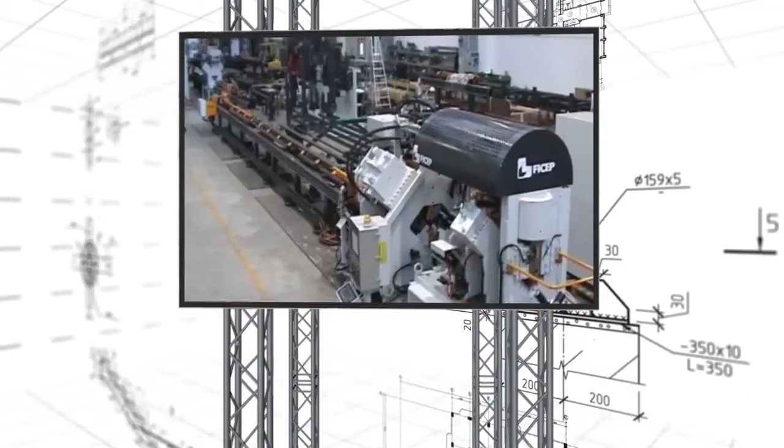The extensive product line for the fabrication of angle iron has traditionally anchored a major segment of FICEP's world-leading position in technology and productivity for structural steel and plate fabrication.

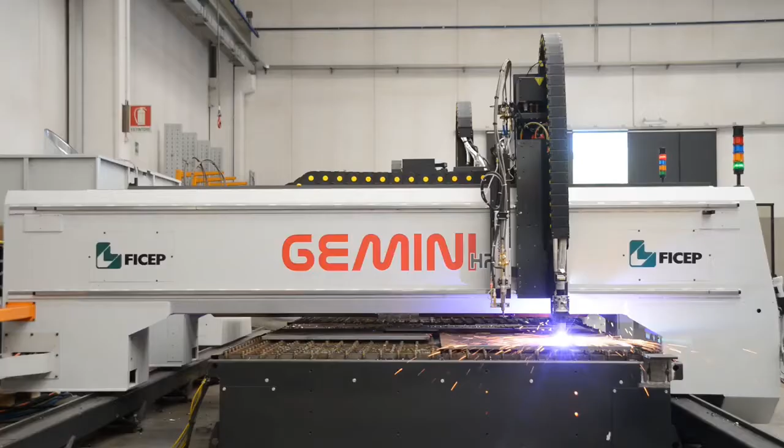The applications that FICEP's rapid angle lines are addressing today are generally for angles found in bridges and some tower components, where high-tolerance holes must be drilled as specified by code.

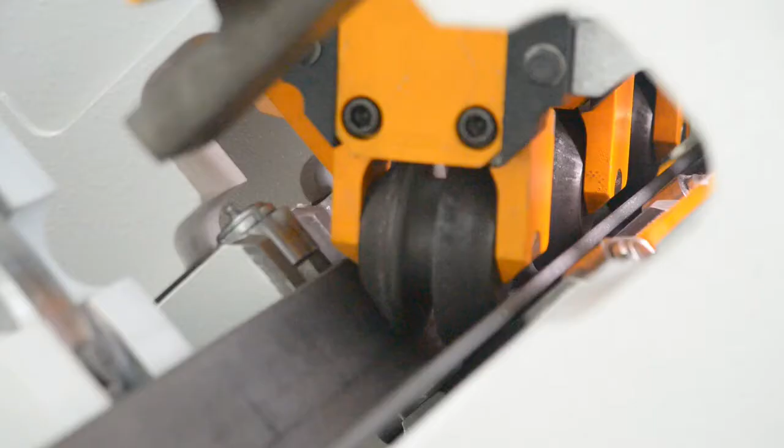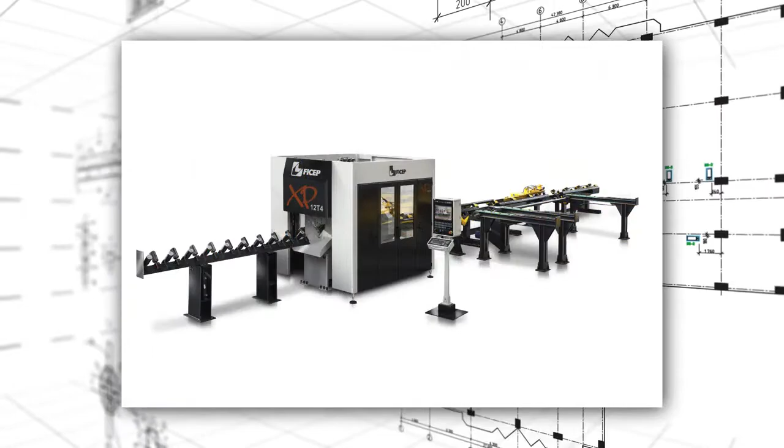FICEP's HP, SP, and XP angle lines feature punching and shearing of the parts with rack and pinion positioning and measuring systems. They are ideal solutions where a high tolerance is specified for the fabrication of many manufactured products and construction projects like towers.

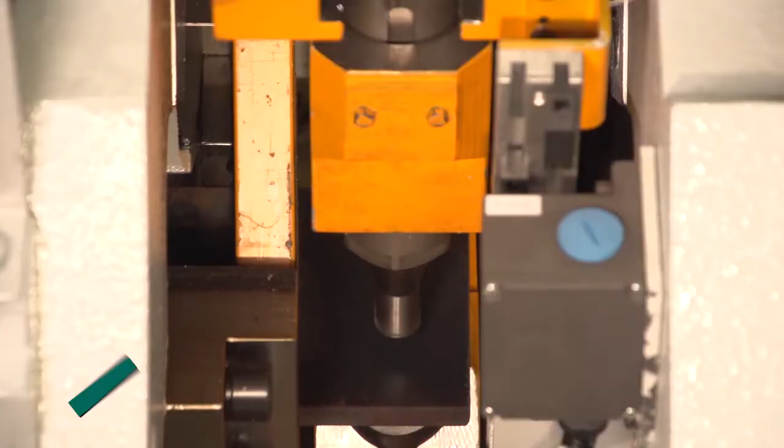The focus of FICEP's A-series angle lines is generally furnished for detail elements found in typical structural steel fabrication. The entire punching, shearing, marking, positioning, and measuring systems are all incorporated within the fabrication cell.

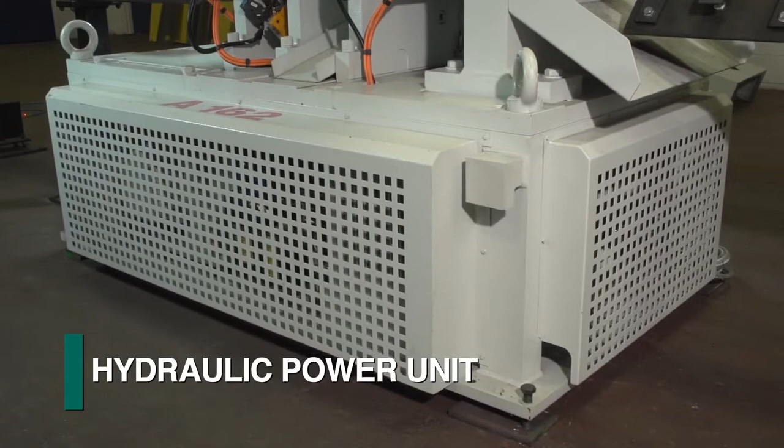Even the hydraulic power unit is integrated into the machine base to minimize the required footprint. This design configuration makes the A-series lines ideally suited for locating the infeed outside the general fabrication bay.

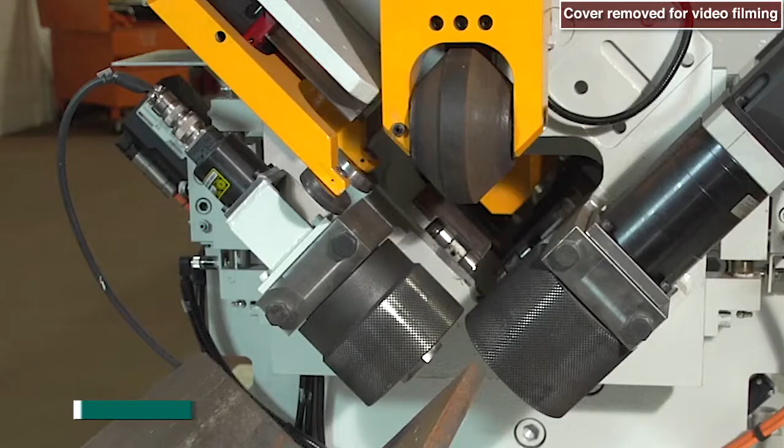Once the leading end of the stock material is conveyed past the initial roller feed drive assembly, it is clamped hydraulically for automatic positioning and measuring.

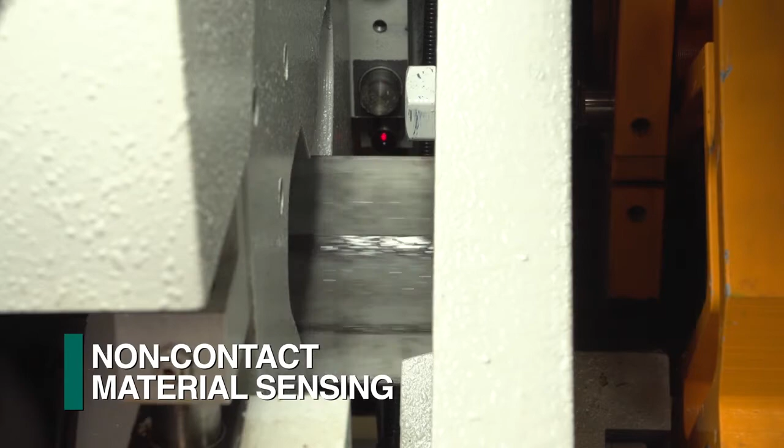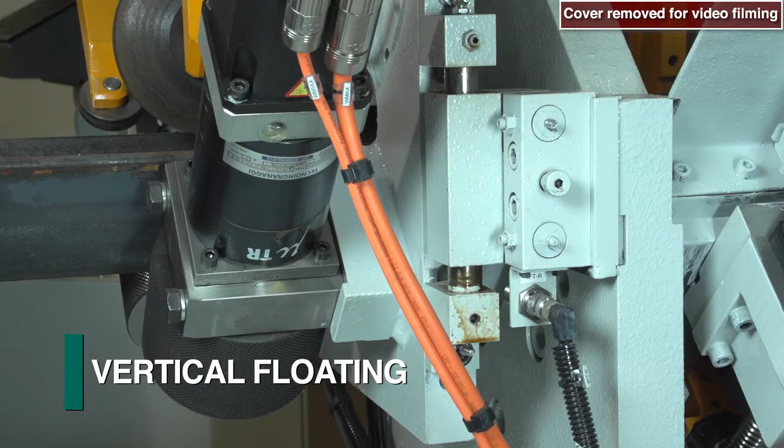The leading end of the stock material is established with a non-contact sensor as a reference to locate the programmed operations. As angle material can be received from the mill with such rolling tolerance deviations as twist and bowing, the roller feed system on the A-series angle lines is designed to float both vertically and laterally.

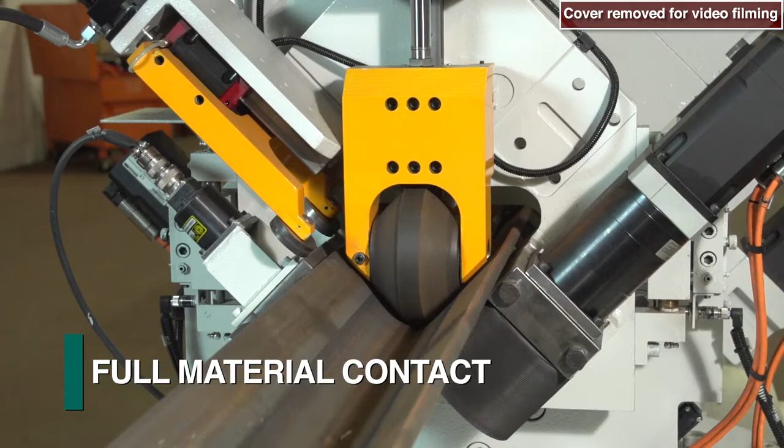The roller feed assembly consists of two serrated wheels, one for driving and the second for measuring. Both maintain full contact with each angle leg surface to achieve maximum performance and accuracy.

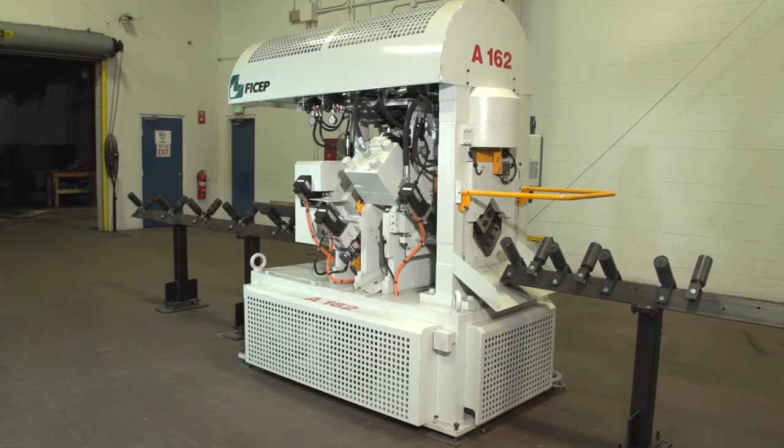The heart of the fabrication cell of the A-series angle line centers around the punch press assemblies. The two punch frames are totally enclosed bridge-style presses that are rigidly mounted to the machine base.

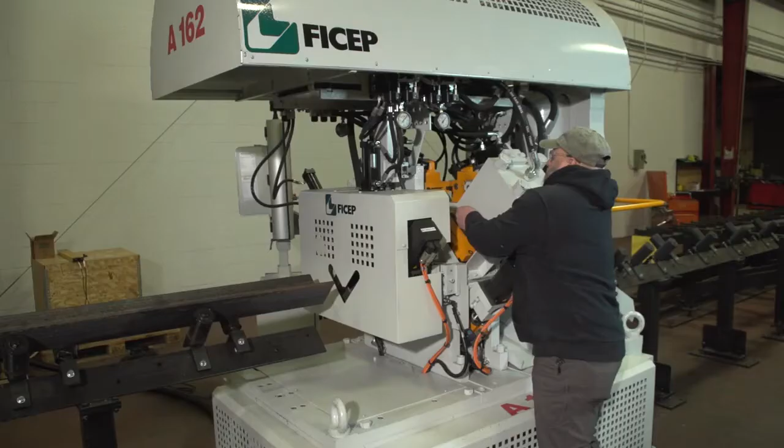Each bridge press assembly can be furnished with 1, 2, or 3 quick-change inner C-frames. They can be easily removed, and they are keyed to facilitate the alignment of shape tooling.

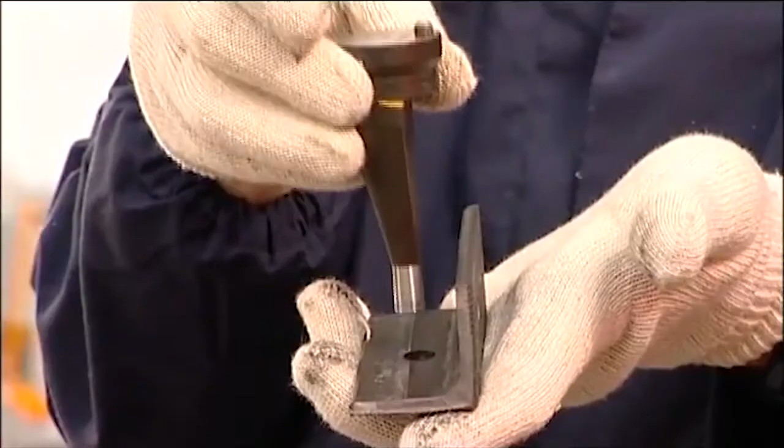This design enables the utilization of different C-frames to accommodate the maximum hole size and even special tight gauge applications in the same part. Once the tooling is changed, the inner C-frames can be slipped into the bridge presses in seconds. Each inner C-frame is a separate controlled axis that can be rapidly positioned to the required gauge line to minimize non-productive process time.

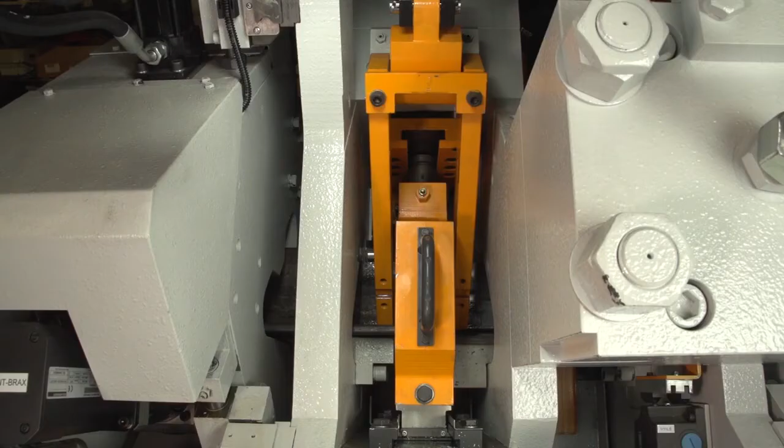Only the tooling is moving to accommodate changes in the gauge line, as the permanently mounted press remains stationary. When the inner C-frame is not required for punching, it is positioned outside of the punch ram so it is not activated.

This design eliminates the need for punch gag assemblies and their related parts to accomplish this function.

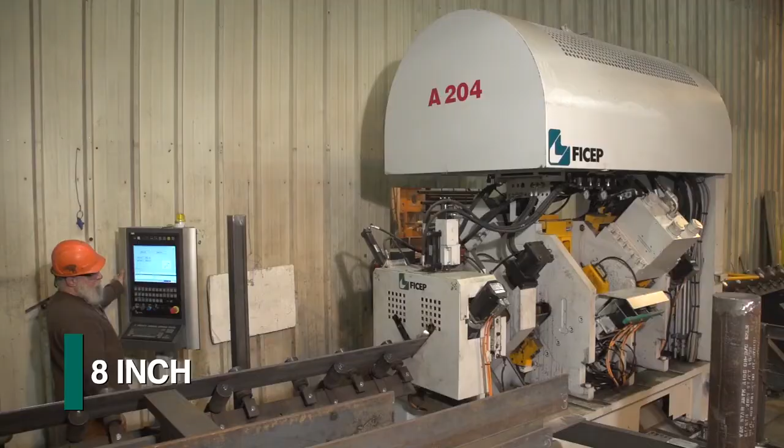The FICEP A-series angle line models for 160 or 200 mm angle legs can be furnished with either a programmable or a cartridge-style marking press.

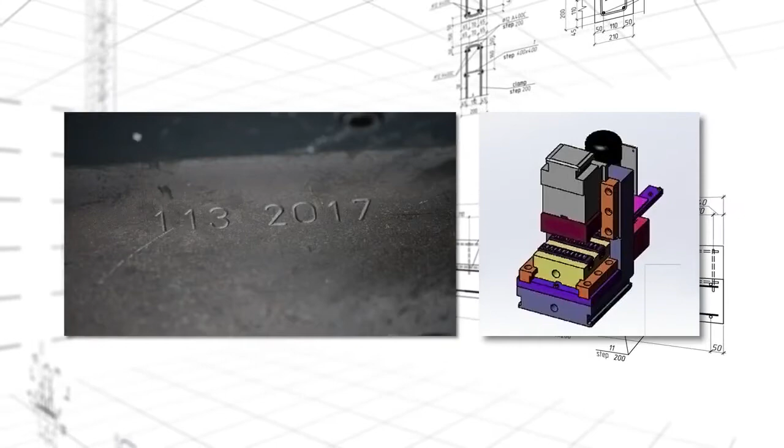The A-series angle lines can also be equipped with an optional multi-function press. This versatile press can be furnished with quick-change tooling for large hole-size punching applications, notching, or even marking to expand their versatility. Mounted just before the shear is a second roller feed and drive assembly to maximize stock material utilization.

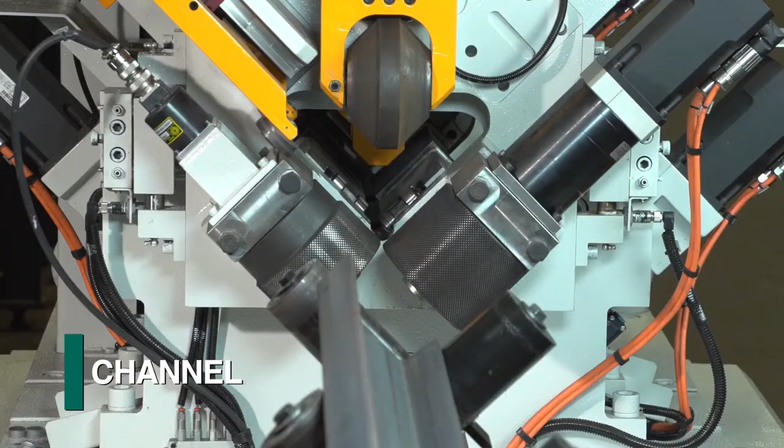The A-series angle lines can be supplied with additional clamping and tooling to also process flats and channels to further enhance the system's versatility. The material positioning rate of acceleration and deceleration, quick gauge line changes during the material positioning cycle, and high-performance hydraulics translates into industry-leading productivity for roller feed angle lines.

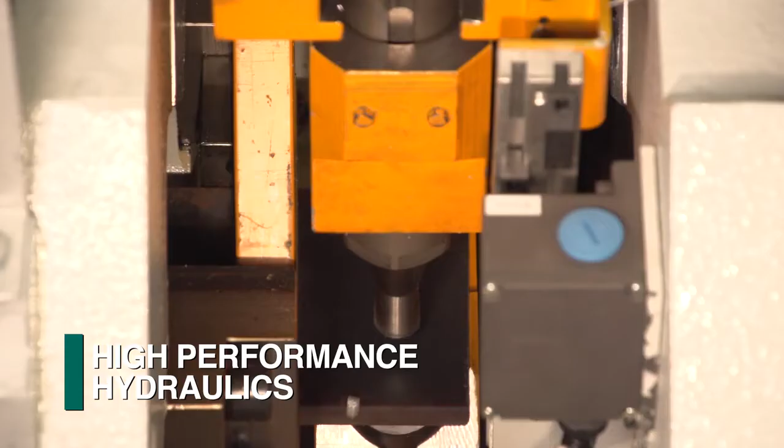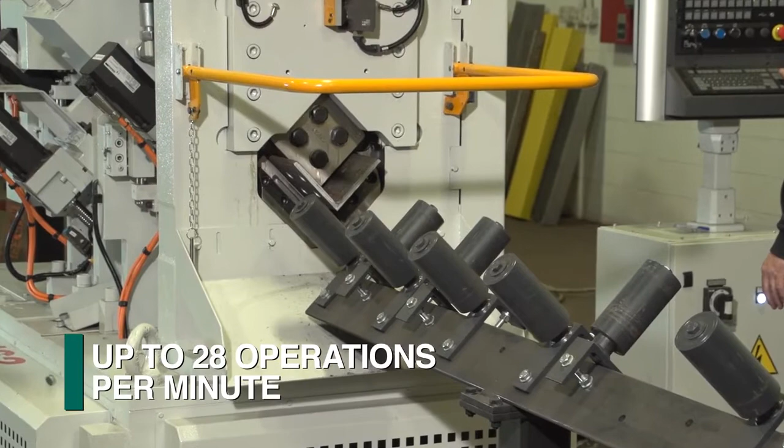For example, the A-series angle line can accomplish approximately 28 punching and shearing operations per minute when generating typical connection angles. The A-series angle lines represent just a small portion of the FICEP family of angle fabrication lines.

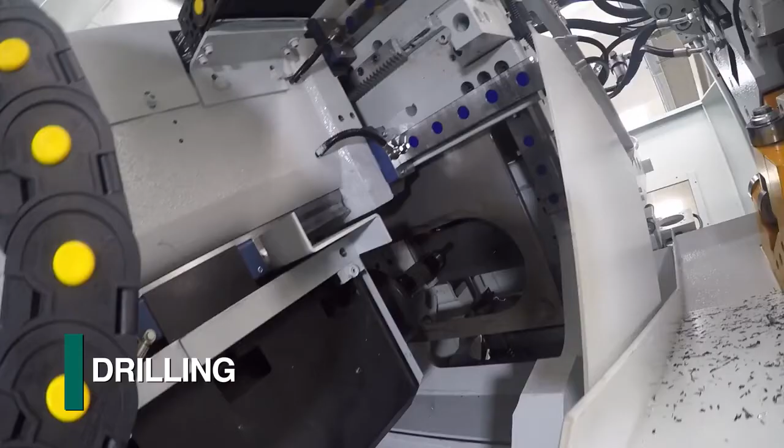The total product line addresses punching, drilling, marking, notching, shearing, and sawing. All products can be integrated with automated material handling systems for stock length loading and unloading to increase their efficiency.

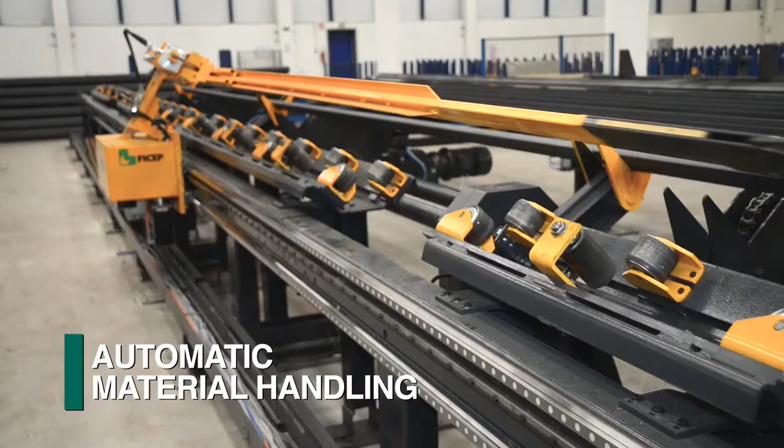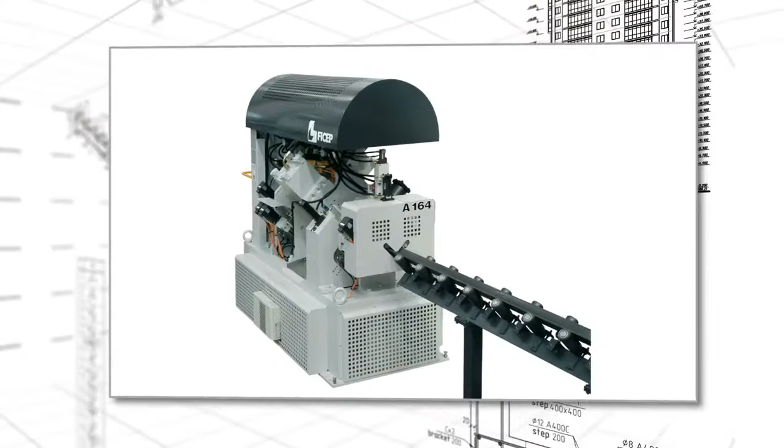Let us review in detail your angle, flat, and channel fabrication applications to determine what is the most productive and economical approach for your firm. The diversity of FICEP's 29 different models and sizes of angle lines enables us to suggest the ideal solution to your application.